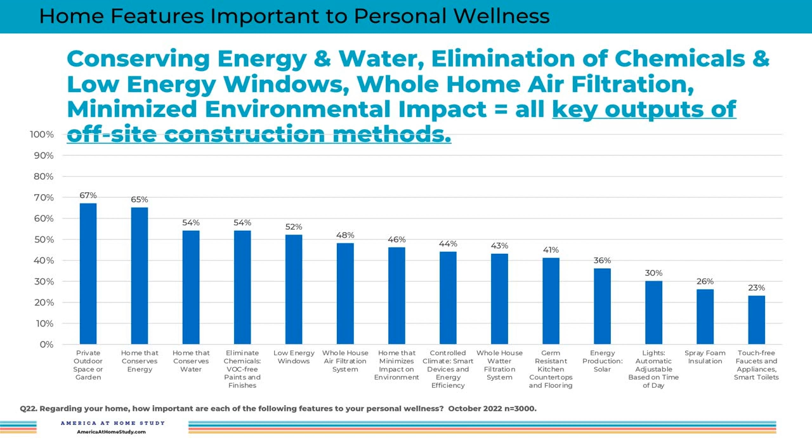Hard to see on the slide, on the screen perhaps, but the PDF will be available afterwards as well for you to dig in more detail if you're interested. What I want you to notice: conserving energy and water, eliminating chemicals and VOCs, low E windows, whole home air filtration systems, and then the macro, a home that minimizes its environmental impact, were all important features to one's personal well-being for more than 50% of the respondents. And all of these are key outputs of the offsite construction methodology, which is super exciting.

So if these are important to them, why were they important? Well, having done consumer research for about 20 years now, typically when you ask about sustainability, energy resources and so on, saving money is the number one motivator for why people choose those technologies. This is the first time ever that I've seen 'improves my health and wellness' rise to the top. I'll give it to you, it's only a 1% point difference, but it's now the number one purchase motivator for choosing these technologies in new homes and communities.

Huge opportunity. So we've heard the moniker health is the new wealth. I think it's really wellness is the new why. Wellness is why people will choose to purchase different things in their homes and look at homes that think about their environmental footprint differently today than ever before.

Next slide, please. So really, in summary, what this is all about and what I hope we'll show you today with this amazing team is that we started with insights about what people want in a home. Then we collaborated with a team, a multifaceted, multidisciplinary team, on designing a home for the future that we think will address some of these needs. And really, that's innovation in action.

And there's no one better to talk about that than Dennis Steigerwalt.

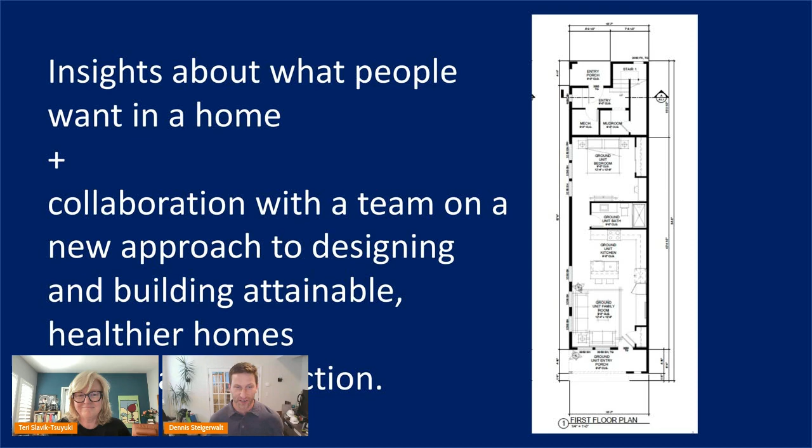All right, thank you, Teri. I'll tell you, all that data is a tough act to follow. And all that data is exactly why this partnership started, just over a year ago now.

So Teri and I had a chance to connect at the Urban Land Institute's spring meeting in San Diego in March or April of 2022. And in that conversation, I had a lot of praise for the study and the work that they did on the first concept home, which is the Barnaby house they delivered with Garman Homes in Raleigh, North Carolina. And I said to Teri, I said, I got a great idea, just hear me out here. If you were to run a second set of concept homes, would you be willing to invite the Alliance in and share some of the things that we're working on? And she was enthusiastic about the concept and the idea there.

And what we said was, let's look at the livability and design nuance that comes from the consumer work that they've done, but let's tie that to the constructability for the industry. And with where the market's at, we really need to be focused also on the whole attainability underpinnings. So with that, our concept homes were born.

Thank you for switching already, Betsy. So on this slide, we started first with that attainability piece. Let's really look at how we can solve for missing middle housing and bring that into our entire design charrette process. And when we talk about constructability, let's look at an industrialized construction approach. This is something we've had our fingers on the pulse on for years now, but we've also been running a working group specifically focused on this topic.

So I said, let's extract some of the learnings from the working group, take some of the lessons learned, some of the opportunities that exist, and apply volumetric modular construction to the challenge that we're about to take on.

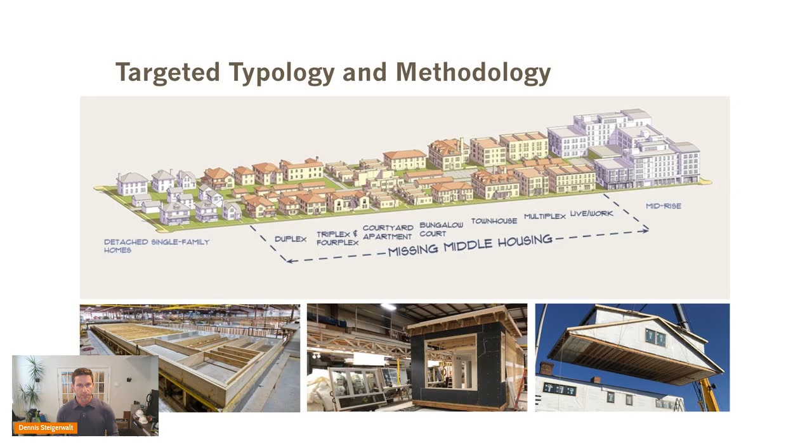Next slide, please. So what we did is we had the baseline of the first two waves of study, the third wave, which Teri just walked you through. And we took that, we overlaid it with the nuances of the buyers specific to the sites that we wanted to work on within the Pittsburgh market. And then as we took that and applied it, we looked at what were the guide rails of using the methodology and the materials that we wanted to incorporate into this project that would allow us to deliver both a for sale and a for rent home through this concept program.

Next slide, please. So in typical Alliance fashion, we threw everyone in a minivan, flew them to Pittsburgh first, then threw them all into a minivan and ran around the Pittsburgh market to better understand the process, the people, and the products behind delivering a home using volumetric modular construction.

So we had a chance to visit a few factories. We visited with a few finished projects. And through that exercise, we were really able to understand what could be done and how these solutions not only could apply actually in the Pittsburgh market, but how they have applications throughout the United States as a whole through vacant lot applications. If you'll jump to the next slide.

So through that tour, we were able to take the three founding groups behind the America at Home Study, overlay that with the four creative and insight groups that were part of the first two waves, and then bolted on or integrated our group of experts from the local market, which was SMI, EcoCraft, City Studios, a local architect, and Tangible Materials, along with a media partner, professional builder, to help us communicate this message to the world.

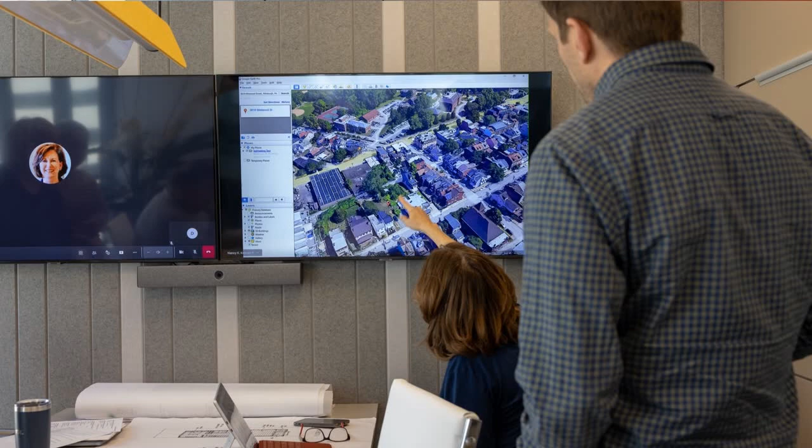So through that process, we identified it. We worked on our sites and made sure that what we were going to design for this site, again, was applicable to other sites in Pittsburgh, as well as other sites around the United States so that we could share the model. Next slide. It was, I'll say, a competitive and collaborative process.

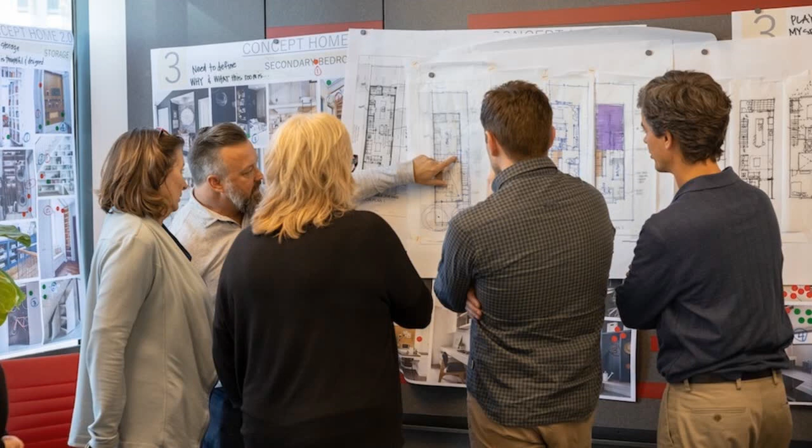We divided into teams, worked through various iterations of different approaches that we could take, and you could jump to the next slide to get a little bit more of that. And then ultimately what we came back with after a few days of being locked in a room together was we came out with some great friendships, stronger relationships, a better understanding of what it takes to deliver a home using this design build methodology of volumetric modular and industrialized construction.

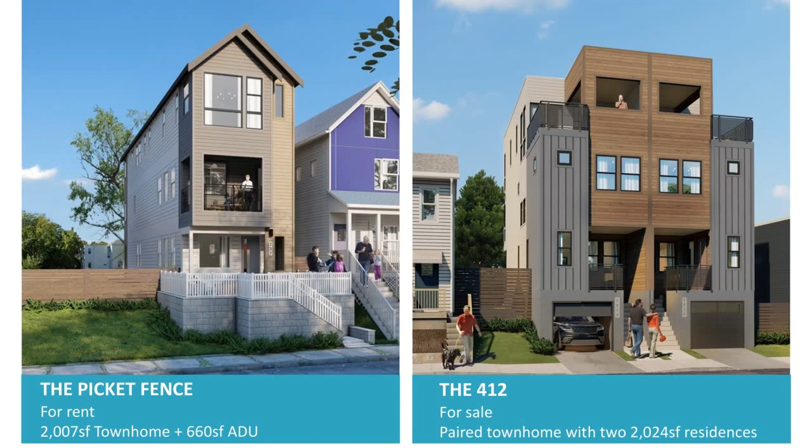And then ultimately we landed at the final two concepts. If you can give me the next slide, that'd be great. Awesome, thank you. And where we landed was two homes. One I mentioned that would be for rent and another that were for sale.

And taking into consideration what we talked about when we talk about missing middle housing typologies, the Picket Fence, which Ryan White's going to get into much more detail on, became a great understanding of how we can create two units that look like one and create a great home environment.

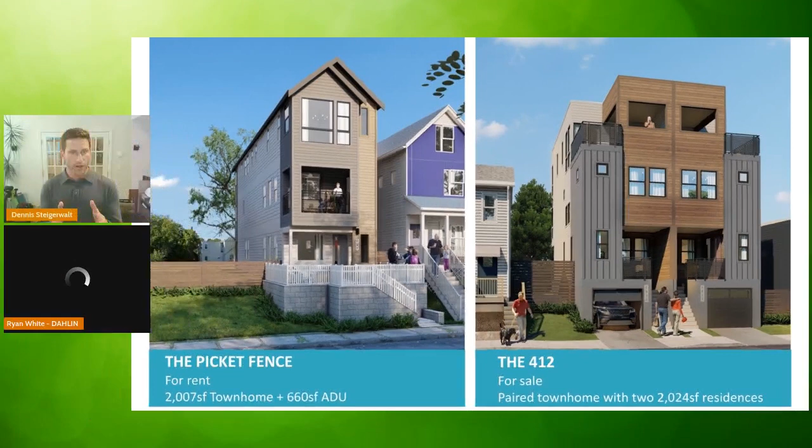And Ryan will dig into the details there.

And then the other one was the 412, which allowed us to create a paired home, a paired townhome concept, which utilized not only the sites that we had specifically selected, but could be leveraged on sites throughout the city of Pittsburgh, Western Pennsylvania, across the country. So that's how this whole thing was born and how the team came together.

Ryan, I'll leave it to you to run down the picket fence and share with everyone how we came about the design principles there. Thanks, Dennis.

Yeah, if you go to the next slide, perfect. So the picket fence, as Dennis talked about this ideation, Teri talked about the data. I think a lot of the times when you come to concept homes, they become just a concept, but this is an effort where we were able to actually put the D in R&D. It's something we're very proud of, to go through this whole process and really have something tangible that someone will actually live in. So this is an amazing thing.

As Dennis mentioned, with the ideation process, it was really taking the time to understand who's going to live in these homes and how will they live. So in the process, it's holding each other accountable as we make decisions in design. It's designing to the design principles for this home, for this buyer, or in this case, this renter.

So this renter is actually the trailblazer millennial demographic. They're 25 to 34 years of age. They're actually the highest average earning income of all the millennial demographics. And 41% of them are couples with kids, and 29% of them are couples without kids. And what's interesting about this demographic is 33% of them prefer to rent.

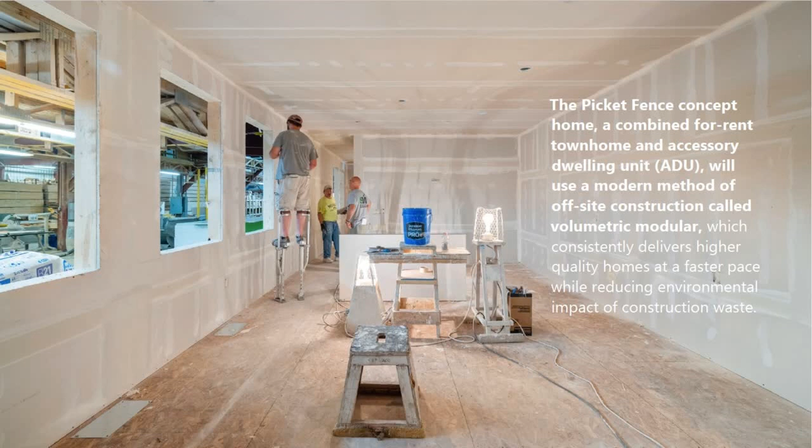So on the next slide, you're going to see an actual picture of the ADU on the first floor being built. And the ideation and construction, the collaboration didn't stop when it was pencils down in the design. Eric and the Dahlin team and the whole team, with weekly calls, really made sure that as the homes were being built, we still collaborated to make sure our design principles were in place.

As Teri mentioned, with the wellness aspect being so important to this demographic and this renter, as we started to get into some of the designs we came up with in the initial sketches and collaboration, we found as we got into costing, as typically happens in a project, you need to start value engineering. So how do we remove windows while not sacrificing the amount of natural light that's so important to the spiritual and emotional wellness inside of the home?

As we start to get into constructability, making sure we have proper shear so we're not adding cost that would raise the rents of these homes, as Dennis mentioned, the attainability. So it's really that process continued all the way through, and it was just something that was a collaboration all the way till these homes are actually now built and out in the yard at the factory.

So on the next slide, you're going to see the floor plans themselves. As we talked about attainability too, one of the thoughts as we started to design these homes is the site would have allowed us to do a 65-foot deep module. But what we learned from the factory was that if you went to 64 feet, it allowed them to build all 3 modules on the line at one time.

And by reducing that 1 foot, it built efficiency in the yard, in the factory, while not sacrificing any of the livability or aesthetic of the home. So that was a very important thing to learn in the process and the collaboration on this.

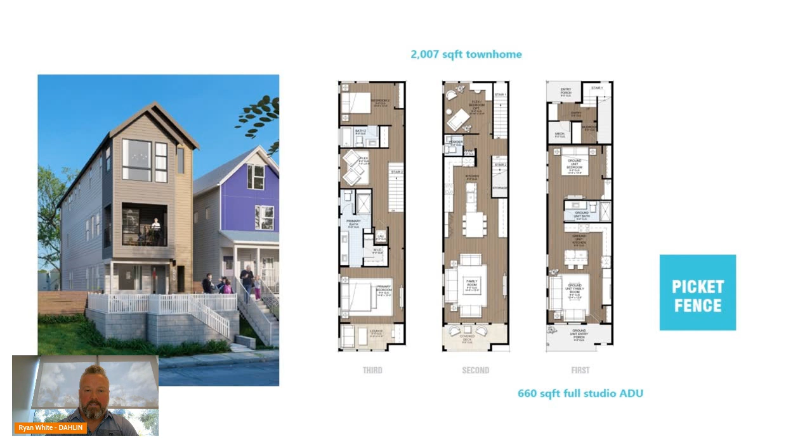It enters off the front of the street, and I'll go into that a little bit in a minute. But the main unit enters off the rear with a private alley, and it sits above that with 2 floors with a 2007 square foot townhome.

On the next slide, you're going to see one of the design principles we came up with: 94% of this demographic say the first impression and safety is key. So where these homes entered, how they entered was very important.

The ADU, the reason we put that on the front is it got enough room to have an actual yard with the picket fence, which is where the name was derived from. We had a traditional picket fence on this small little home. You get a private yard and a great front porch before you enter the home. So that creates some separation from the actual street to the home, adding a sense of safety for the occupants of this home.

The reason we put the main entry of the upper unit and the bigger unit on the back of the home was this home actually has an alley back there. You're still going to get that room for their own little yard with the picket fence, but they have room for a private parking space. So with the bigger home, we felt it was a little more valuable to allow them to have a private parking space as well. And what this also did was create a true vestibule.

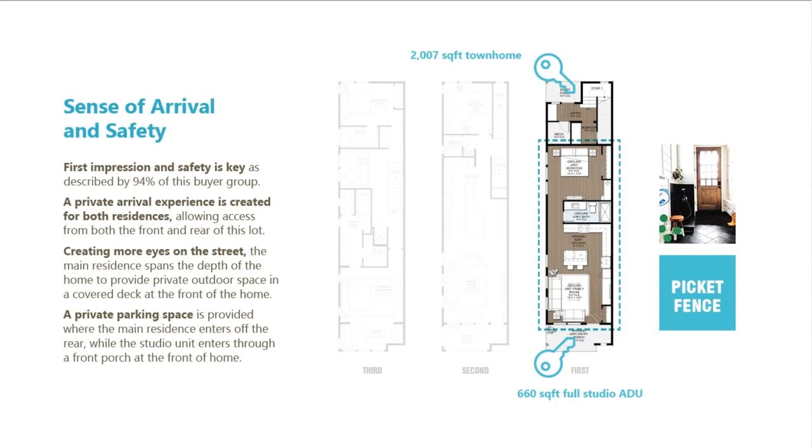So when your guests do arrive, you could greet them there. You can take their coats, and you really have a sense of safety before you bring them upstairs into the rest of the home.

As you go upstairs, on the next slide you're going to see the family room. 67% of this demographic say this is a place to gather. This is where you entertain with your friends. This is where you socialize. So this is a space where the location is very important, and how it lives in the home is very important.

On the next slide, you're going to see the design principle we came up with: the family room is the heart of the home. So its location is very key. The indoor-outdoor livability for that wellness aspect, the amount of natural light that comes in there, the adjacency to the kitchen as they're entertaining and gathering with friends - this is really important.

Another key factor is the location of both the family rooms and where the private outdoor space is for these homes. And this really has to do with the holistic approach to wellness for community. With the ADU having the front yard and the front porch on the street, the main unit above also has a private deck that can look down on the street.

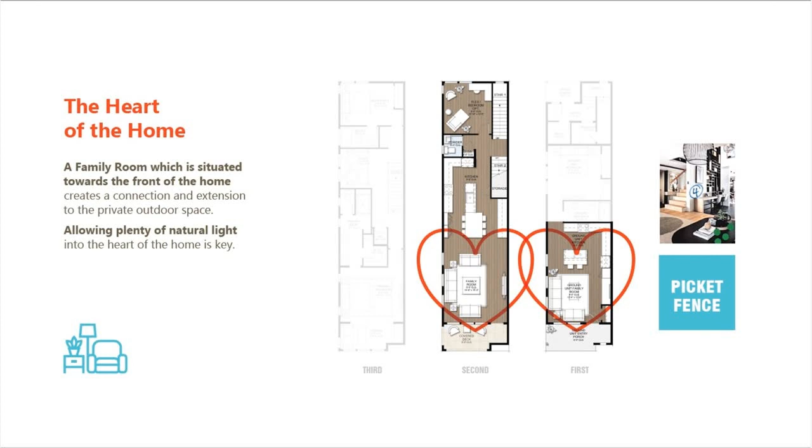Now you have more eyes on the street. That adds for safer communities. So now it's a holistic approach to wellness for community and not just for home.

On the next slide, you're going to see the adjacency. The other design principle is the hub of the home - the kitchen. The kitchen is for more than just cooking. The kitchen now is a place to entertain. This is the place where you're going to have appetizers, but it's also functional to cook.

Same thing on the other side, the way the cabinets step back for extra storage. We got plenty of storage in this kitchen - that stepped back design allows for more floor space and functionality. But that part of the island really became a great spot to be that true hub that links you from the kitchen to the family room and then even the views out to the private deck.

On the ADU, we also did that kitchen where you have room for some stools, because this is maybe the smaller couple, the two of them eating, and it might flow into the family room for that connection.

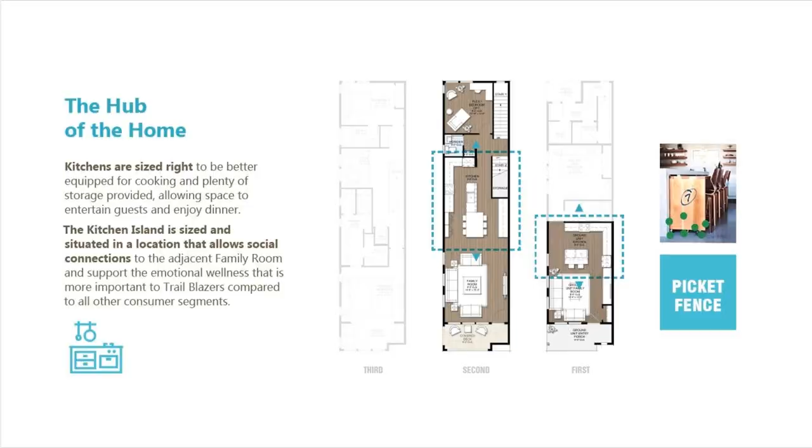On the next slide, you'll see how we incorporated our design principles into this, their precious personal space. With the main unit upstairs, we focused on what that meant, being more than just a bedroom. As you can see at the bottom of the upper floor, we enhanced that space and added a lounge with room for a love seat, maybe a Peloton, and a desk for working. This is the space where they unwind personally before going back down to the heart of home.

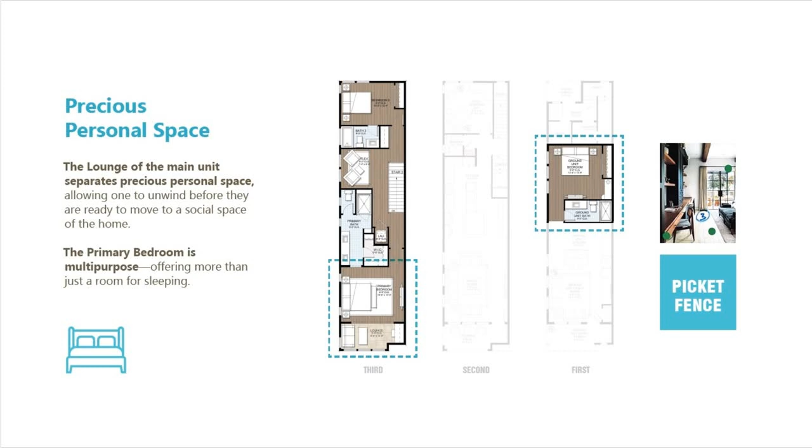The heart of the home is where they socialize with family or guests. We were able to accomplish this even in the ADU, despite the small footprint. In the lower right, you'll see a space where you could put a desk so someone could work from home, a space for a love seat or couch, or a Peloton. So even in this smaller 660 square foot unit, they still get a place for their precious personal space.

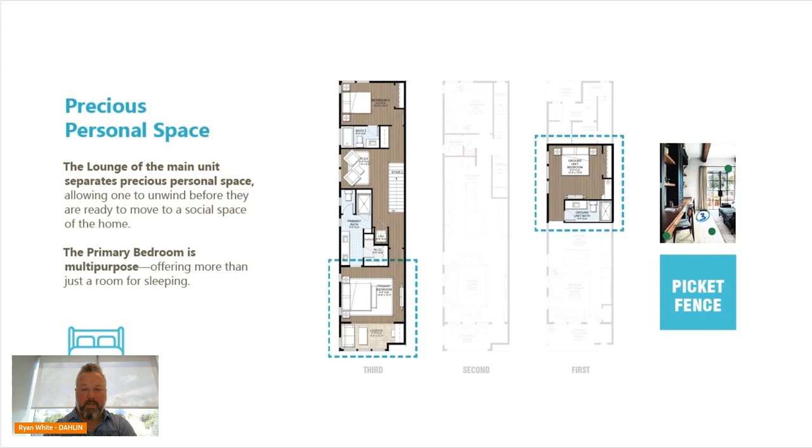On the next slide, you'll see the flex space. 33% of this demographic say home is a place to work. Given the high percentage of couples with or without kids, that probably means two people working from home. So the flex space needed to be thought about as more than just a bedroom.

On the next slide, you'll see our design principle of square footage where it counts. Typically when we design homes, we think of bed-bath count, but as Teri mentioned, we really focused on space count. Once you define a room as a bedroom, that's a 10 by 10 foot minimum with a strip closet. So think of that size allocated just for a bedroom function that could instead be optional for something else. Given the size of family for this demographic, it doesn't need to be 10 by 10 — this can be the space that gets downsized.

It's a space where they could work. Since the lounge in the primary bedroom has that other desk space, the couple has two places to work from home. It could be a place to just relax, as you see in the image, it could be a small library, or a place to exercise. Or as their family grows, maybe the upper bedroom becomes where their younger or first child lives, and the flex space becomes a nursery as the family starts to grow.

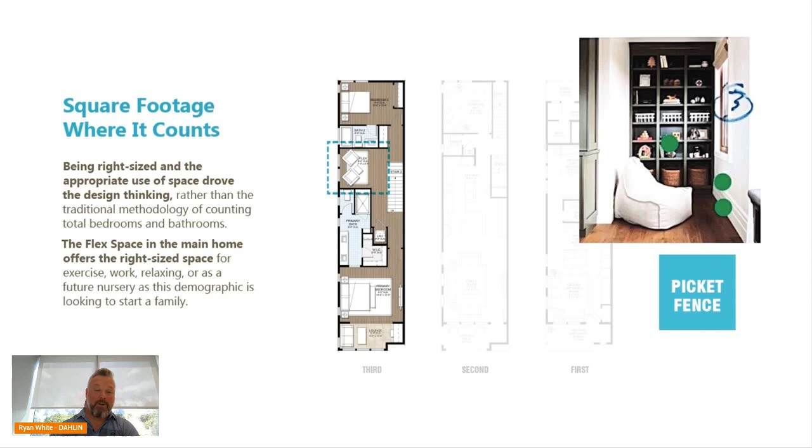Square footage where it counts was really key on this home, and that's the last design principle I'm going to cover. We'll turn it back over to Dennis and Nicole to talk about sustainability.

Yeah, right on. Thanks, Ryan. Great walkthrough. So just to kick things off, I want to reconnect our sustainability and resilience goals back to the whole theme around constructability.

The first of these goals comes back to, when we talk about a high performance home, this ties back to a lot of the data Teri shared at the beginning around the livability element. It's really about how we focus on indoor air quality desires, clean water, and overall comfort for consumers living inside this home, and how they enjoy their space and create peace of mind, even in the face of a major climate event, for example.

The next goal, focusing on construction or waste generation, really ties into how we as an industry can look at and achieve some of the goals being laid out, which Nicole's going to share with us on a national scale. Really, how does shifting things from on-site to offsite impact the waste we generate through the build of a typical residential home?

And then if we think about, we want to be people friendly, we want to be planet friendly. How does this all tie back into the footprint we leave on the planet as we create more built environment? So really taking a look at an ambitious goal around carbon reduction as it relates to embodied carbon and operational carbon. And for today's conversation, we're going to really dig into the reduction in carbon emissions.

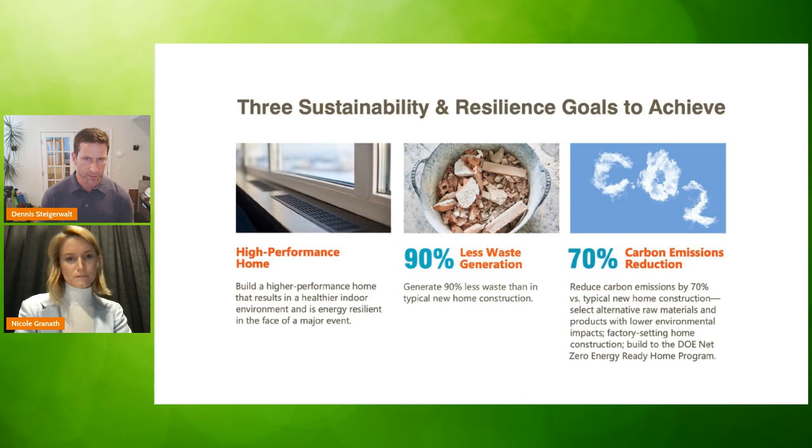So when we talk about the reduction in carbon emissions, this is something that we certainly could not take on our own. So we're very excited to have a fantastic team working with us. We have Nicole Granath from Tangible, who'll be explaining how we're approaching this process holistically. But we also have a great resource in our friends at Cal Poly with Miriam Kuhi-Rostami. Miriam's been a great resource to us in understanding the implications on embodied carbon within the build methodology itself. She's really helped us to create a framework and break that down.

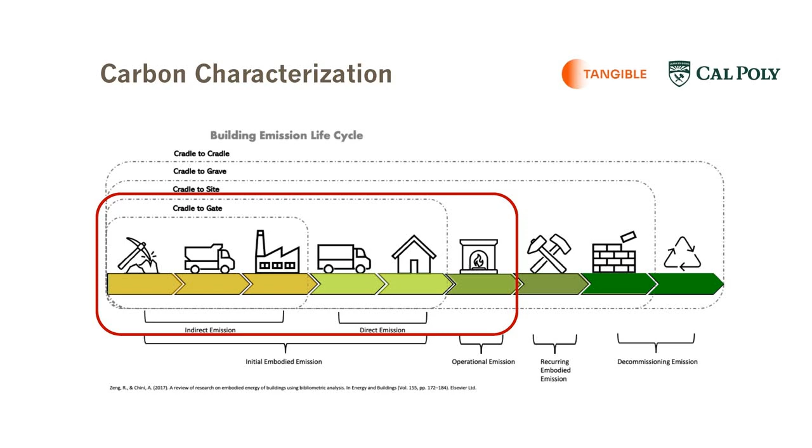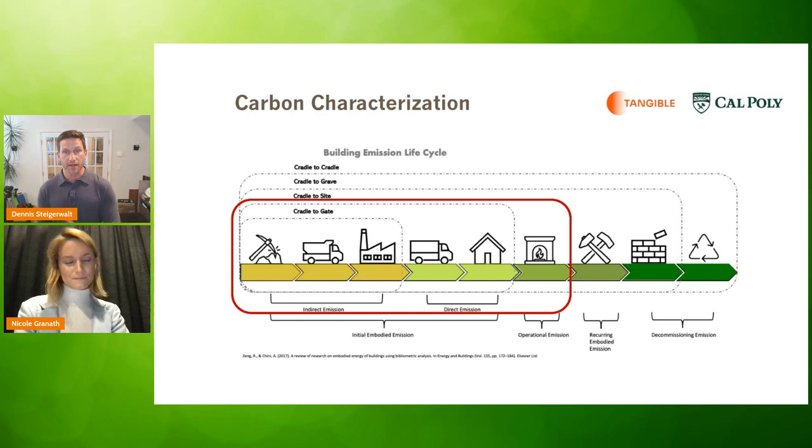And why that's important is, if you look at the entire life cycle of the built environment on this diagram, it's important to understand where we're focusing for the purposes of our study today. So we're going to look at the embodied carbon that goes into the manufacturing of a product, the logistics of that product, and then ultimately how the home is built for the direct emissions piece. Then we're going to add on the operational emissions component, which helps us understand not only what we're putting into the house, how we're putting the house together, but also how the house is being operated and what impacts that has on the long-term environment. So with that, glad to have Nicole here to dig into this deeper with us. Nicole will share how Tangible is supporting this and creating transparency around what we're doing from a carbon characterization perspective.

Thanks so much, Dennis. Excited to share with you all the work that Dennis so kindly teed up there.

I think a lot of what we've been honored to be involved in this project stems from the spirit of collaboration that each of the members of the coalition have brought to the project. And so we're excited to contribute our part to that.

So for our part, thank you, Betsy, our goal as a company is really to turn buildings into a solution to the climate crisis. There's a lot going on right now that is making the impacts of the changing climate very real and easy for us all to understand the direct effects on our life. And so, as Teri was talking about, we are having some additional reconsiderations as maybe a broader society around what types of purchasing decisions we're making, what types of spaces we want to occupy, and ultimately how we are going to have those reflect the world that we want to build.

So next, the problem we need to address in order to get there is thinking about how exactly we are going to alter the materials that we're building with. And as Dennis mentioned, a lot of the impact of constructing a house comes up front from the materials that are selected. Globally, these building materials are responsible for 11% of all emissions. And within any given house, the emissions to create those building materials tend to be equivalent to about 10 years of actually operating that property. So you have a really big moment here to make a decision around what types of materials we want to use in the project. And I think the Picket Fence house is a perfect example of where an opportunity exists.

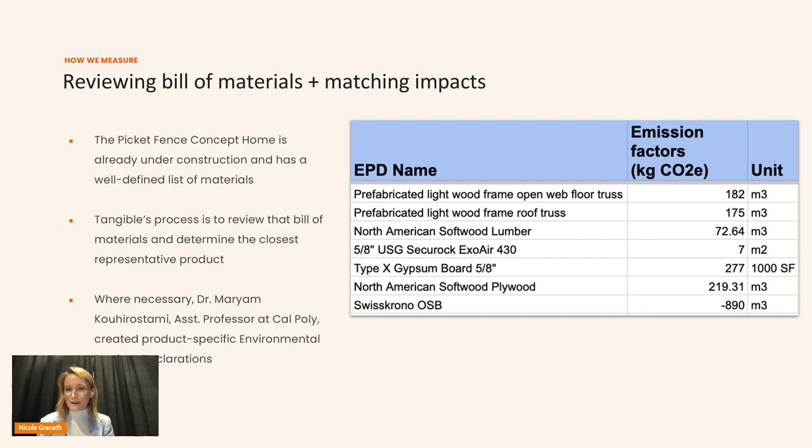And then as we go through and confirm those emissions factors and units, we are also working in close collaboration with Dr. Maryam Kouhirostami on what blank spaces exist and where there are areas she has been able to create new environmental product declarations.

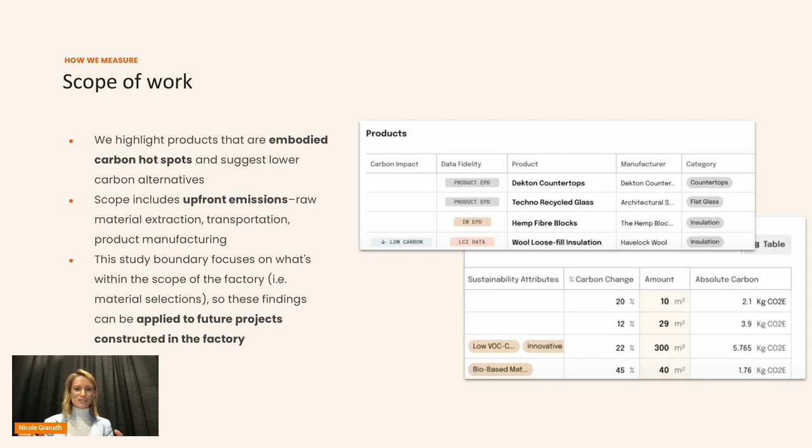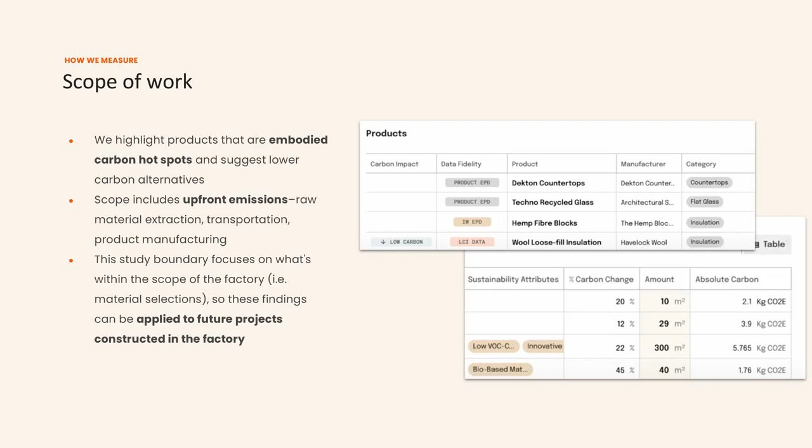So lastly, the focus of this measurement effort is very much looking at the material selection standpoint. The goal of this analysis is to highlight the embodied carbon hotspots. This embodied carbon, the carbon emitted to produce these building materials, is one of the core areas that, upfront in designing the Picket Fence concept home, has a massive impact on the environmental impact of the home itself. And as a lot of these projects continue to go out, the beauty of the analysis we're doing right now is that these findings can then be applied to any future concept homes or additional iterations of the 412 that is coming up.

So there are a lot of learnings to be had from studying what types of building materials are in the project right now, how we can transparently declare that, and then how that can help inform future decisions as well.

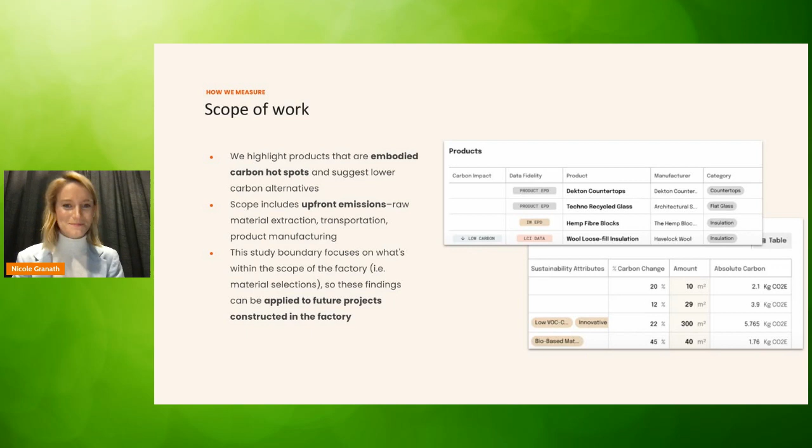So the last piece around this is really that there is a scalable way to see the embodied carbon of the Picket Fence concept home. And this is something we're incredibly honored the team brought us in to partner with all of you on, because it's a very important factor that, if not considered early, can be difficult to change. But because we're able to take a look now and give this transparent overview of the impacts, there are a lot of opportunities down the line for adjustments and alternative products to be made.

Oh, Betsy, you are muted. I did that to myself. I'm going to pull everybody back in. Let's know if we have any questions so far. That was a great overview. I know there were a lot of people at the summit in Denver earlier this year who wanted to hear more about the progress of the project and how everything's been going so far. Talking to you guys over the last couple of days, it's really cool that there are two homes, because you're learning things here and can have almost an immediate impact in trying new things in that second home as well. I'm hearing a little click if anybody's... I don't know where that's coming from. At any rate, I think it might be you, Betsy. I'm not sure, I don't think so. It's all good now. So somebody's enjoying the show with some popcorn, huh? Yeah, I know, that's right. Live TV, guys.

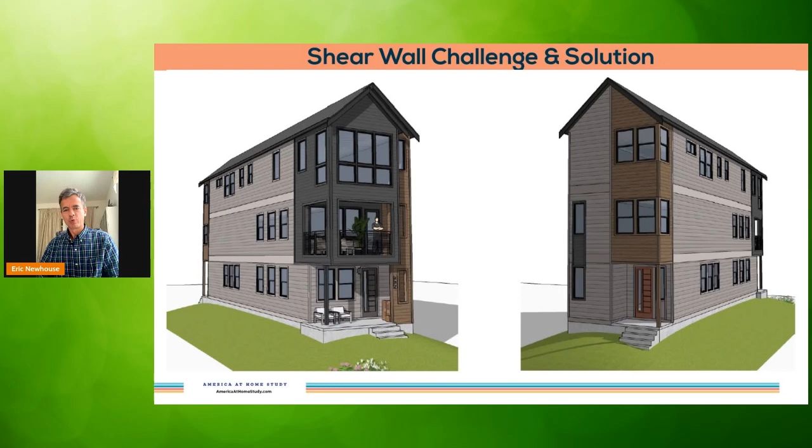So first, shear walls. What's shown on these images is the schematic design that resulted from the collaborative process the others have already described, where we came up with our first pass at how we would deliver on these great design principles and ideas. And the challenge that was the first item we had to work through with our engineering team at the factory is...

...that this is a stacked townhome on an urban infill lot. The lot is 22 feet wide, 100 feet deep. So by definition, the home is fairly narrow and fairly deep front to back, and also tall, in order to provide for the two units in the one residence. The end result is that the building, from a standpoint of shear requirements, is acting as a big sail, with the long sides of the building being exposed to more substantial wind loads.

A typical prescriptive engineering or constructability solution, if we were just going to standard protocol from prescriptive code compliant strategies, would be to configure the front and back of the home as shear walls, meaning they would be largely opaque surfaces with structural sheathing. Clearly that would conflict with health and wellness objectives and the key design principles. So what we needed to work through was, instead of a prescriptive approach, a creative and innovative engineered solution.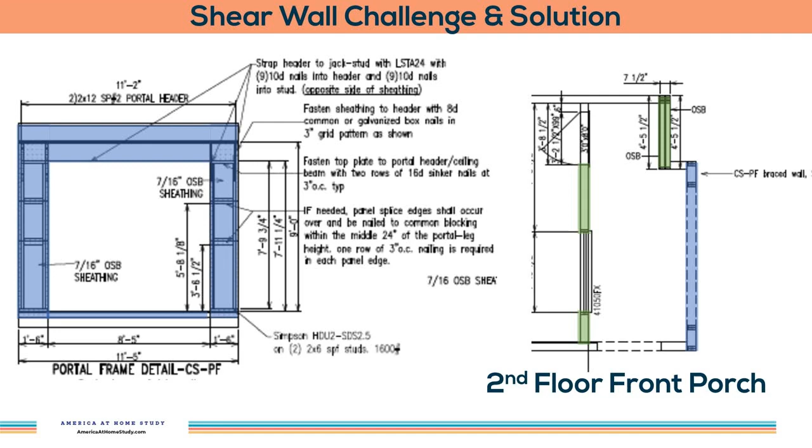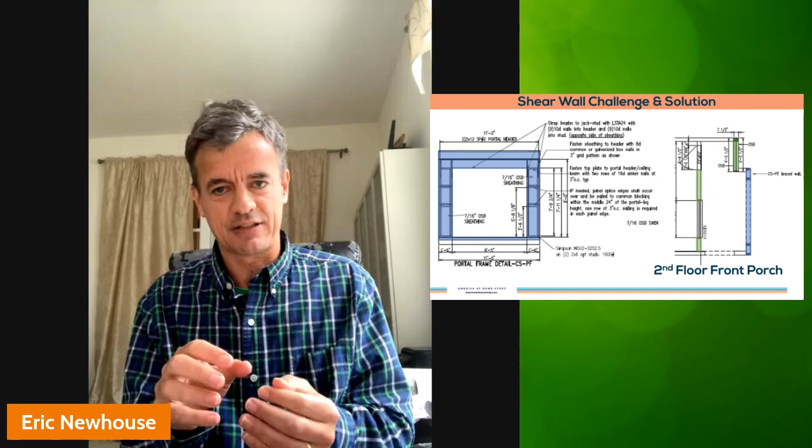This got into very careful coordination with Dahlin and Ryan and the full team at Dahlin to understand the exact dimension of the two wall segments on either side of the portal frame, and the size of the header. So we ended up being able to make just some minor adjustments to the schematic design, to be true to the design intent while meeting the structural requirements. The next slide shows, on the left side, the schematic design of the front of the home before going through the engineering process of working through the shear wall requirements.

The right side shows the final design. In some respects, you can see differences, but I would hope that you'd agree that the fundamental design intent was still accomplished and not compromised by implementation of these engineered solutions.

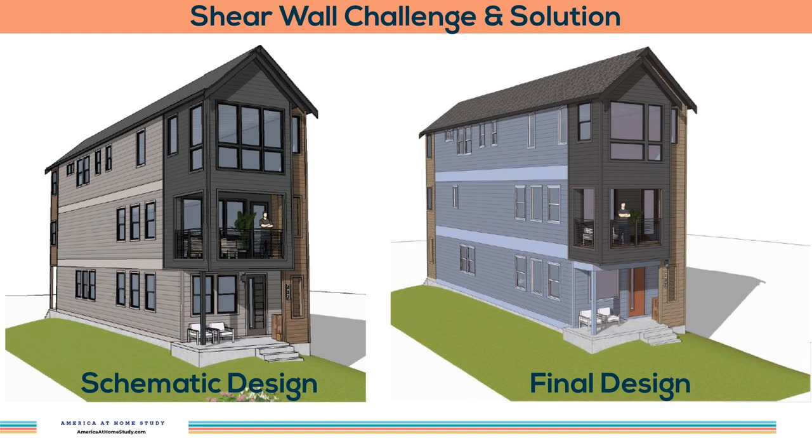In the factory setting, we're able to define these engineered solutions up front, build the home on paper so to speak, and have processes and procedures in place with trained staff overseen by quality control and third-party inspections, to repeatedly and with great confidence implement these strategies and optimize performance while accomplishing structural requirements. The second lesson learned is intimately connected to the shear walls, and that is the window design.

So the home initially - if you could go back one slide, Betsy. Yeah, so again you see on the left-hand side the schematic design, and on the right-hand side the final design. We had to optimize the number of windows, where possible condensing 9 smaller windows into larger fixed windows, to still provide the same daylight while accomplishing cost-effective delivery of the home through the factory with our window supplier.

Another key item we worked through with the Dahlin team was that black windows were an upgrade cost compared to white windows. Whereas the initial design had black windows for the entire home, we came up with an effective design solution that's still aesthetically pleasing, combining white windows on the sides of the home complemented by the light blue siding, with black windows strategically located on the front and rear complementing the dark siding colors. It was a collaborative effort with key input from the whole design team to reflect the design intent without compromise while being cost effective.

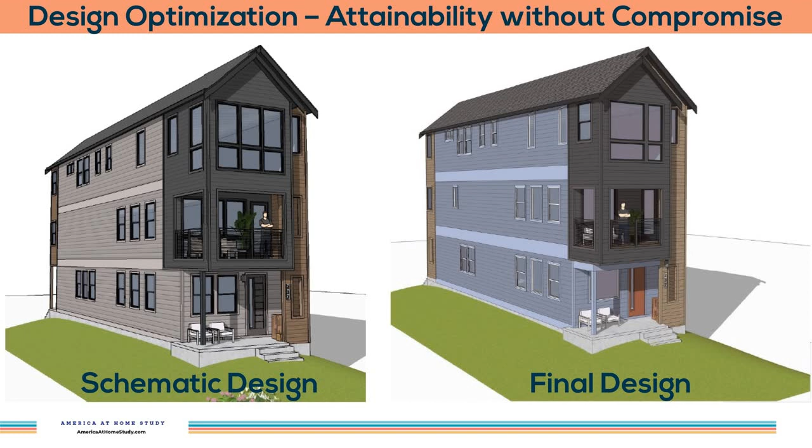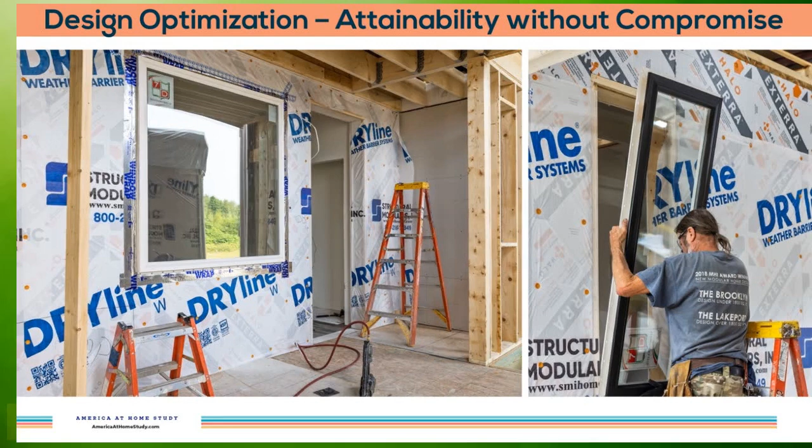The third and final item I wanted to call attention to was how we collaborated on the HVAC system together with open web floor trusses for the floor framing, specifically the Rheia system. If you could advance one slide, Betsy - actually if you could go back a second, I missed the beginning of that transition to Rheia.

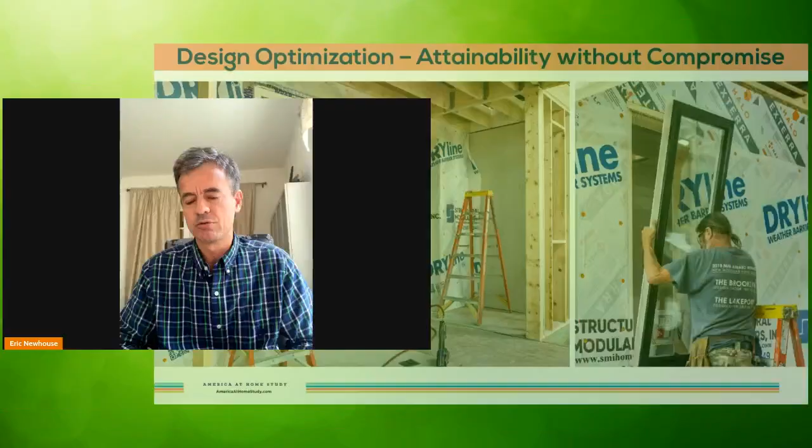The third and final challenge I wanted to call attention to is that in order to accomplish the energy performance and sustainability objectives, we had to focus on the HVAC systems for the home, ensuring they were all located within conditioned space. So by definition, they have to be integrated into the structural components of the house.

The solution we implemented uses the Rheia air distribution system, comprised of 3 and 4 inch diameter flexible ducts and a family of fittings that snap together to make airtight connections with those ducts. Because of the small size, the air distribution system can be integrated into structural elements without significant changes to the arrangement of spaces in the home.

Another key aspect of Rheia is that it's configured for home run distribution of the ductwork - from the main supply plenum at the air handler, all ducts run to separate takeoffs to each register and diffuser spread throughout the home. Because of the airtight, snap-together fitting connections, we were able to implement this in the modular environment, with ductwork installed in the first, second, and third floor boxes at the factory, then snapped together floor to floor on site.

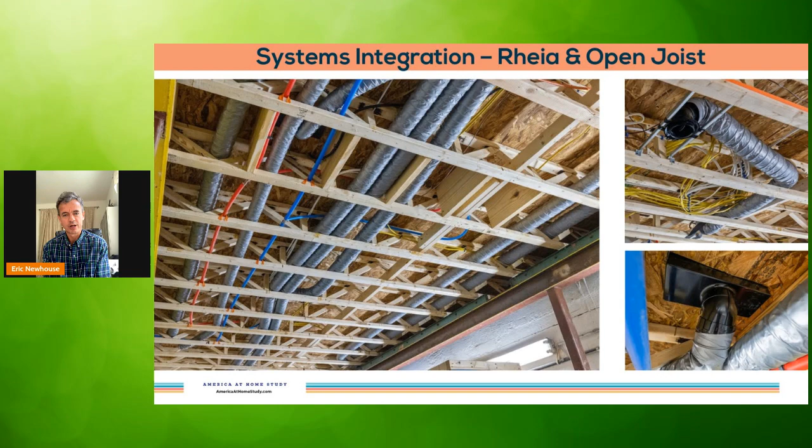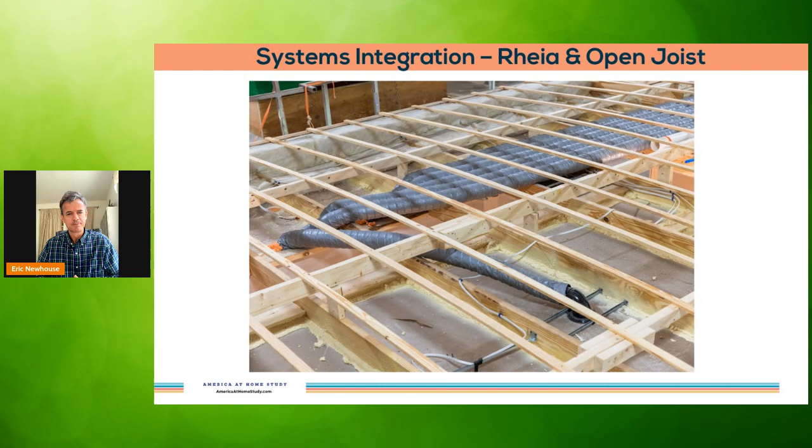The next few slides detail how that was configured in the various spaces. Again, this is the first floor of the home. In the ADU, on the right side of the screen, there's a horizontal flow air handler to be installed in the conditioned crawl space.

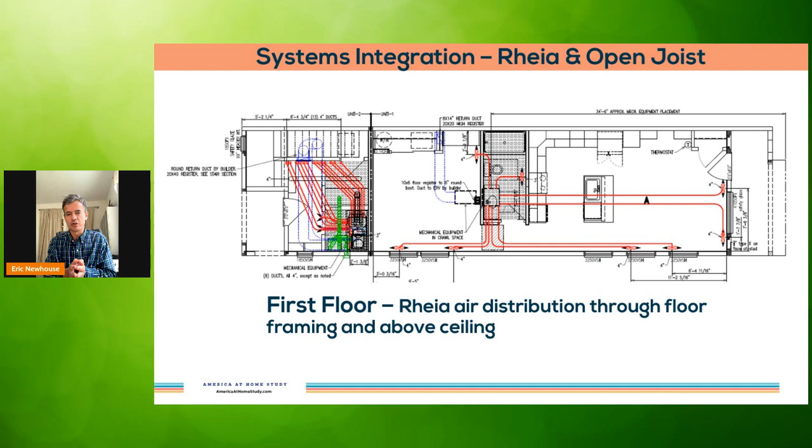For the main townhome dwelling unit, the air handler is on the first floor in a mechanical closet, with the ductwork routed through the ceiling, where it then connects into the second floor.

The most significant impact on the spatial arrangement from this HVAC approach was on the second floor. The walls along the stair and at the one bathroom were doubled up to a double 2x4 wall to allow for Rheia ducts through wall chases. The ductwork to the second floor was routed above the ceiling to ceiling diffusers throughout that space.

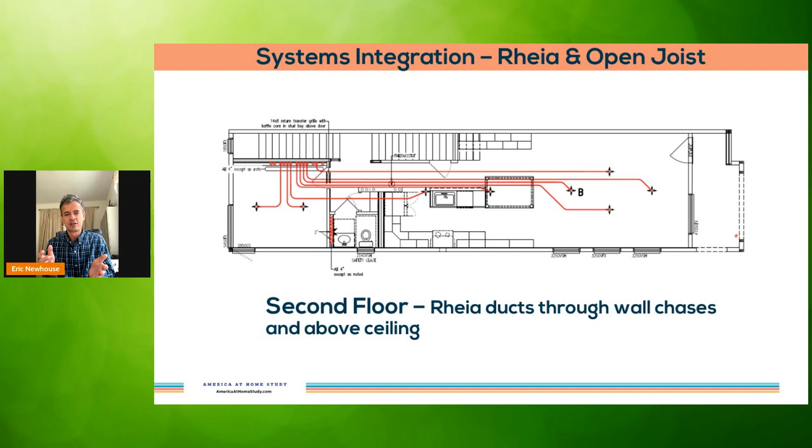Many of those ducts went through the second floor wall to the third floor, into the open web floor trusses, where they're routed through the floor system to floor registers and high wall diffusers, keeping all of the HVAC system and air distribution within the conditioned space of the home.

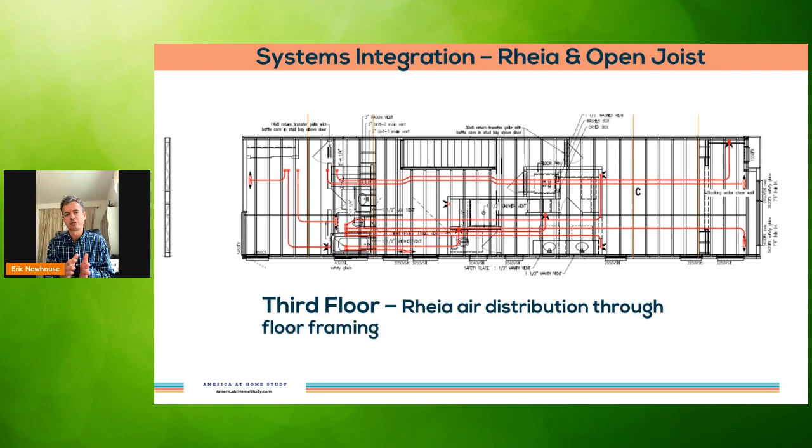All of this was analyzed, engineered, and solved on paper before the home went into construction, and then we were able to seamlessly implement that strategy on the production line in the factory.

Thank you so much. I'm going to bring everybody back in. I don't know why it's making me big—we don't want that, at least I don't want that. Oh, one more, Nicole's down here. So we do have a couple of questions for you.

One question was: did the size of the front bay porch change due to the structural requirements?

No, the size of the front porch did not change. On the second floor porch, there was one wall segment on the right side of the front of the home where the initial design called for an additional opening, not a window, to provide visibility to the street. We needed to turn that section of wall into a fully opaque shear wall, but it was enough of a minor nuance that the overall design intent was still met and not compromised by that adjustment.